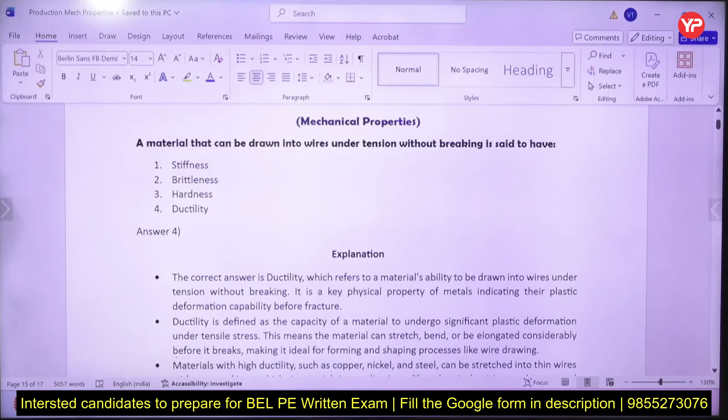These were the actual questions asked: material that can be drawn into wires under tension without breaking, obviously - so ductility. What is ductility, what are hardness measuring devices, what is brittleness, what is stiffness, what is the relation between stiffness and brittleness, and how do you measure all these properties from the stress-strain diagram. As I told you, this topic is a combined topic for material science, strength of material, engineering materials, and production engineering, so you have to think of it as a combined topic only.

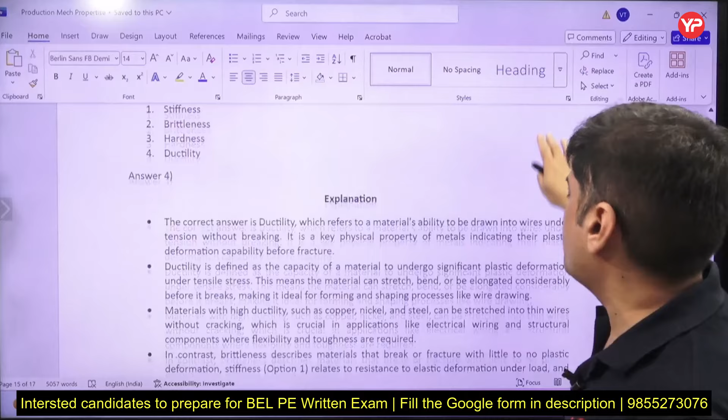It is the ability to draw into wires without breaking, and then there is a similar property called malleability. So ductility and malleability can be known from the x-axis of the stress-strain diagram. Incidentally, gold happens to be the most ductile and most malleable material. Spreading it into sheets is malleability, and when you check malleability, you apply compressive force - you hammer it and spread it into sheets. For ductility, you apply the pulling force.

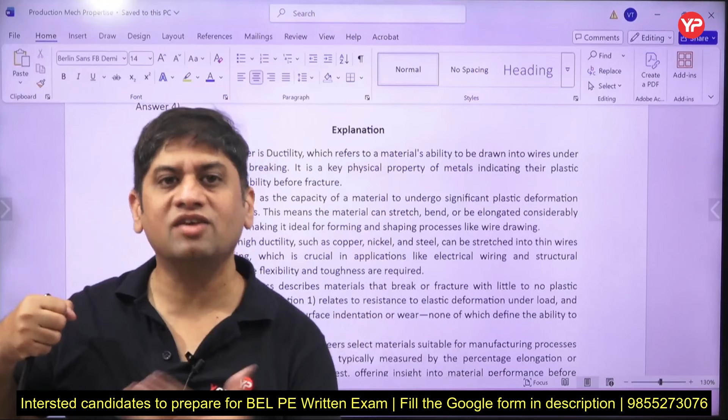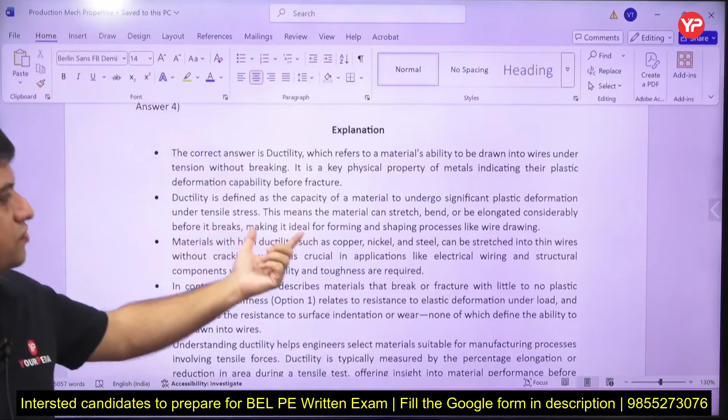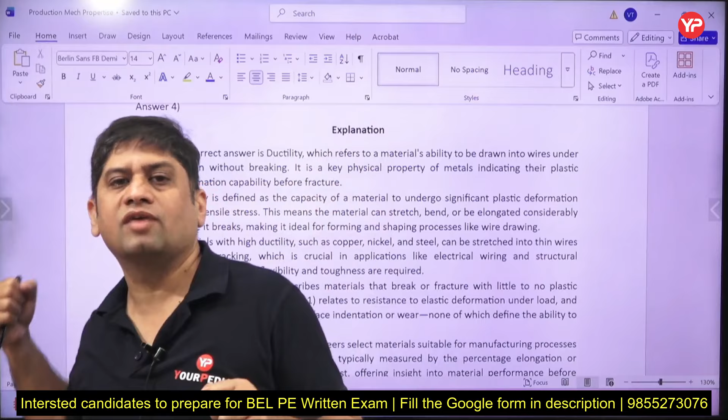Tensile force is applied for ductility, and for malleability compressive force is applied. Ductility is the capacity of a material to undergo plastic deformation along the x-axis under tensile stress. If a stress-strain diagram is plotted, you know the universal testing machine is the device on which you plot it, and in this machine the pulling or tensile force is applied. So a typical stress-strain diagram is engineering stress versus engineering strain, not the true stress-strain diagram.

In engineering stress and engineering strain, you pull and apply tensile force, and then this gets used in wire drawing.

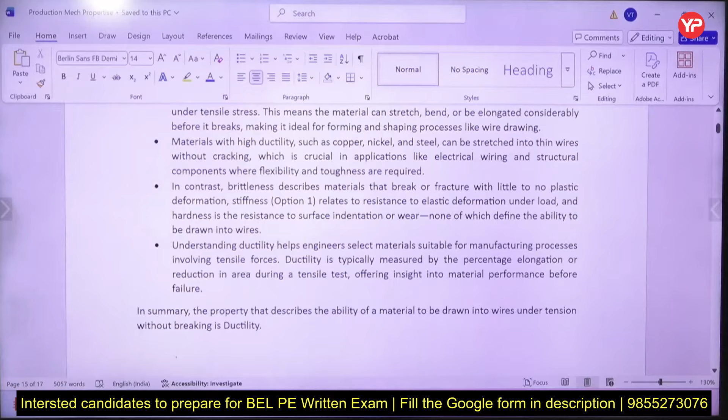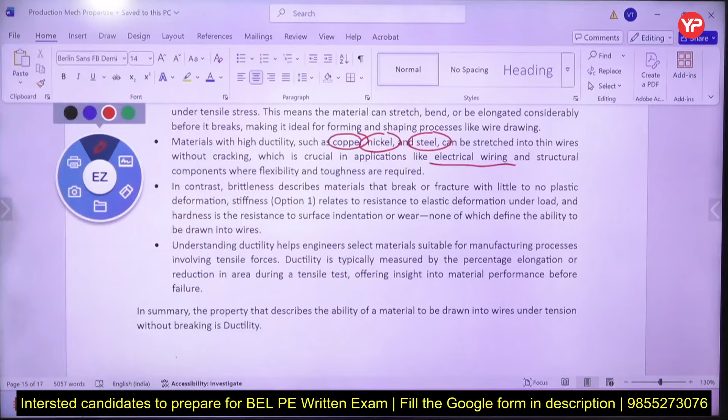The materials which have very good ductility - gold is the maximum ductile, that is why gold is used as an ornamental material. Copper, nickel, steel is a tough material, so crack propagation or cracking is not there. In electric wiring, why do you use copper wires? One reason is conductivity, another reason is ductility. So brittleness is the opposite of ductility - lesser ductile means brittle, it is resistant to plastic deformation, that is brittle.

So something which is not ductile is brittle. And how do you know on the stress-strain diagram whether a material is ductile or not?

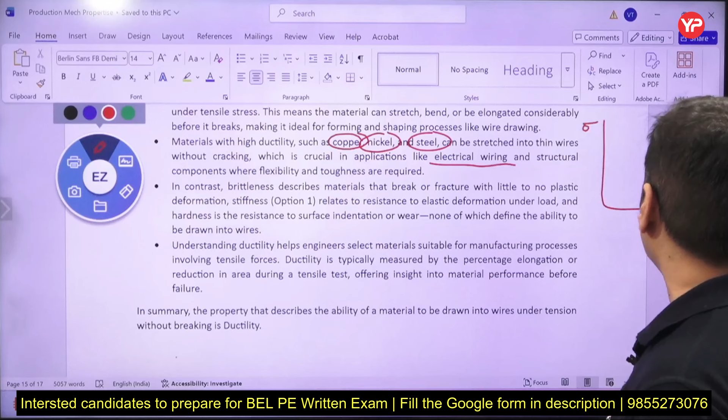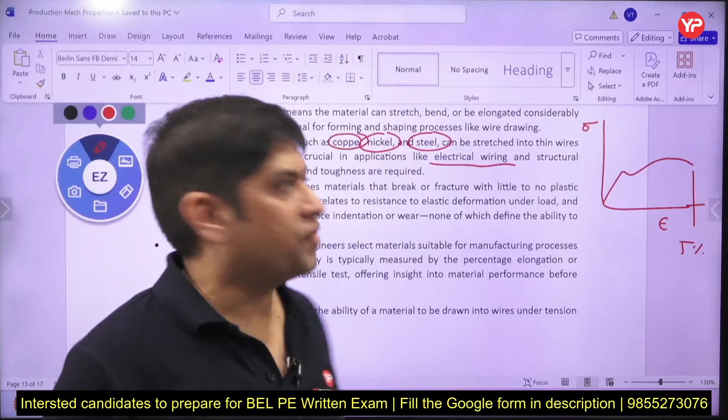On the stress-strain diagram, this is engineering stress, engineering strain. The percentage elongation, that means strain, is calculated in absolute units and also in percentage. If the fracture point is beyond 5% of the strain, then it is ductile, otherwise it is brittle. That is the rough idea of how you know whether it is a ductile or brittle material.

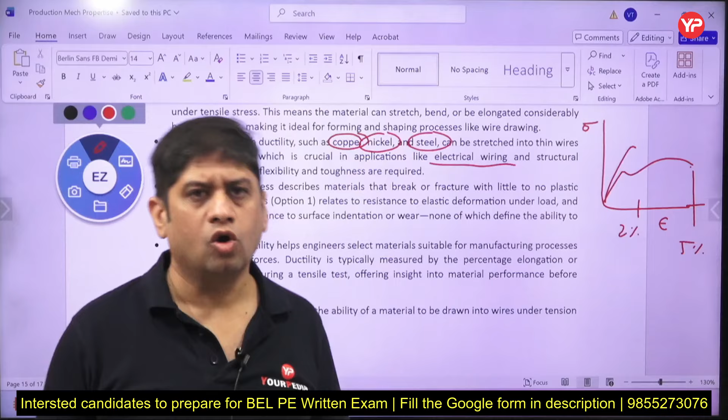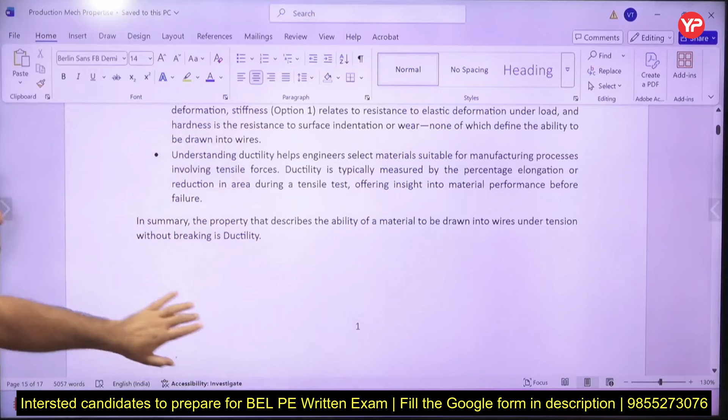So from there you get to know whether it is ductile or brittle. There are many manufacturing processes, like wire drawing, in which you test the ductility of the material. So we discussed where on the stress-strain diagram you find out about ductility.

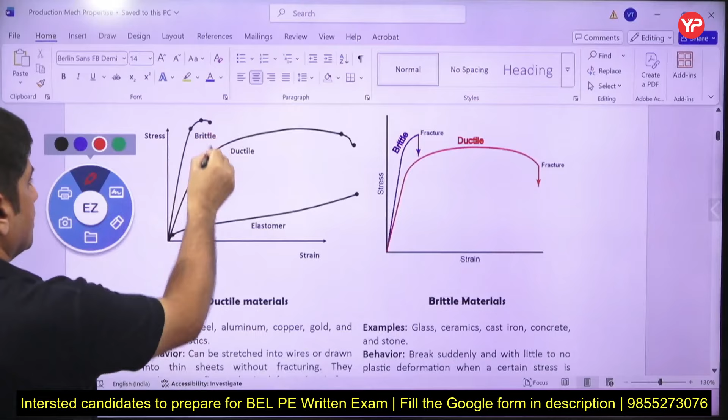I told you the main difference between brittle and ductile on the stress-strain diagram is the plastic deformation region. This region is almost missing in brittle materials. So this side can be the elastic material and the right side can be the plastic deformation material. If you do not find the plastic deformation region, then it is a brittle material.

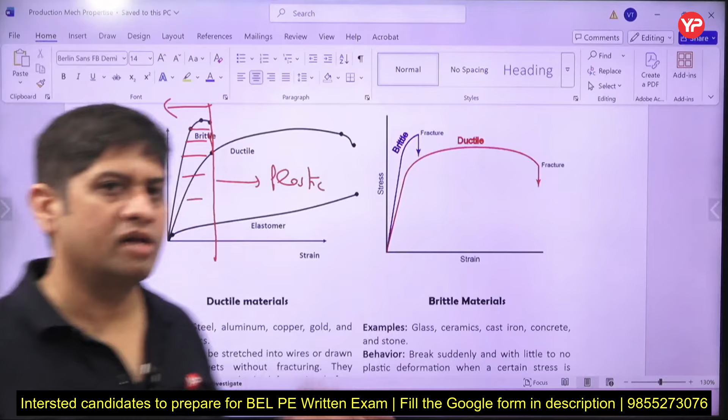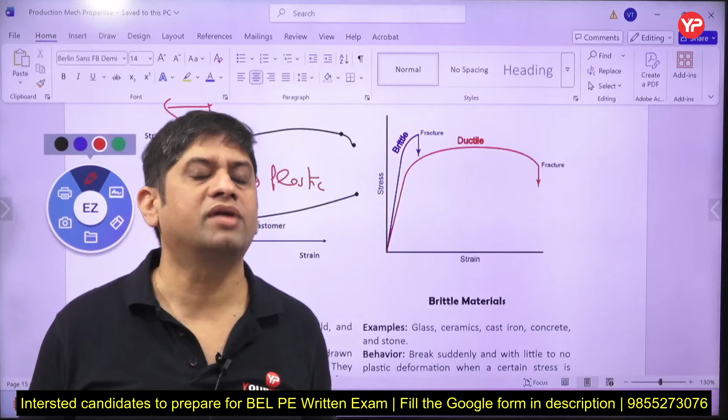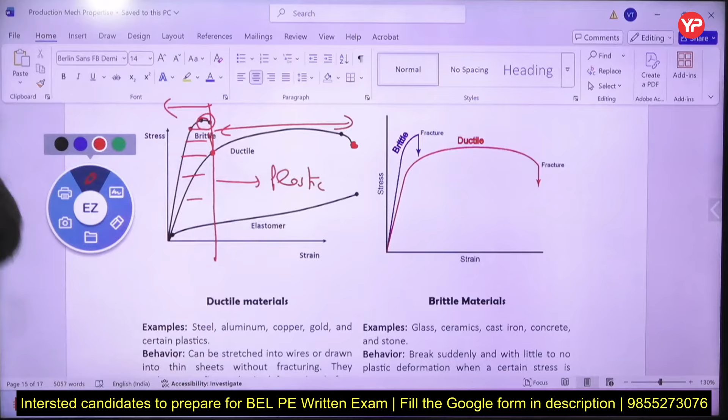Another difference between brittle and ductile on the stress-strain diagram - one I gave you is the 5% concept, second I told you plastic deformation is not there in brittle materials. Third, I am telling you yield point and ultimate point are very close in brittle materials. This is the yield point for ductile, this is the fracture point for ductile - you see the difference. But here, yield point, ultimate point, fracture point - all close. So basically in brittle materials these points are very close, in ductile materials they are far away.

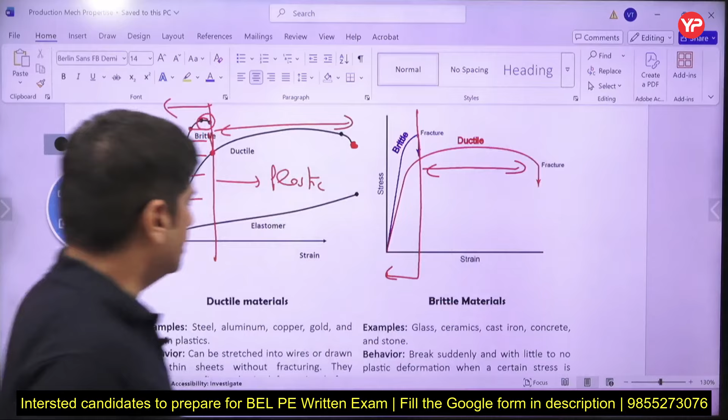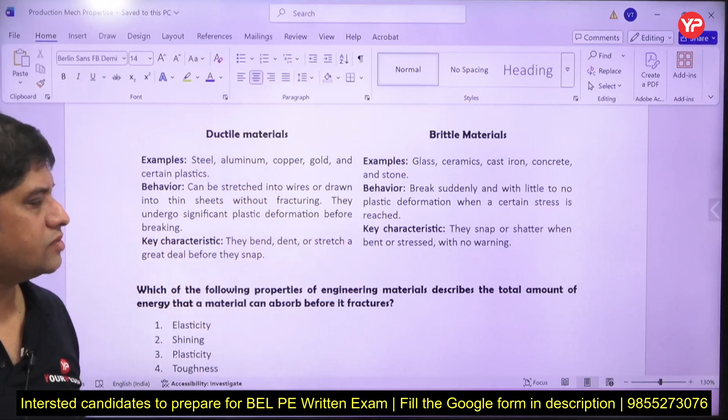So this is typically brittle - the mode of failure is fracture, and this plastic region is your ductile material. Now some examples of ductile and brittle materials, their properties and applications that you should know. Glass, ceramic, cast iron, concrete, stone - these are all brittle materials. Sudden failure, fracture - that is what brittle material is all about.

So, properties of engineering materials - these are actual Bharat Electronics Limited questions. Describe the total amount of energy that a material can absorb before it fractures. Total - so total is toughness. There is a modulus of toughness, and there is a modulus of resilience.

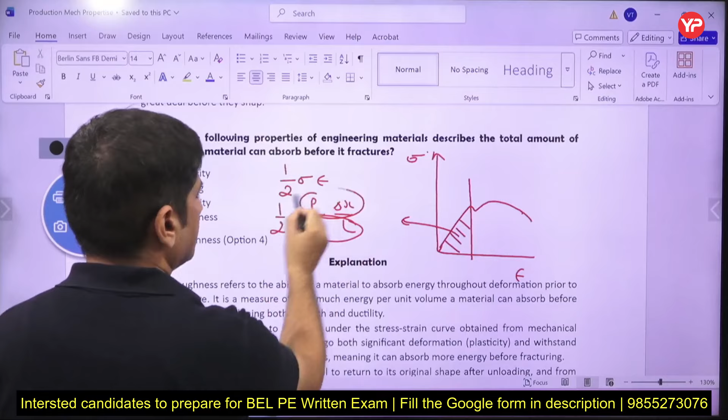Let me give you the stress-strain diagram of mild steel. This is the elastic region, the area under the elastic region - and for the unit of the stress-strain diagram, this is half of stress into strain. Stress is load per unit area and strain is change in length over original length, so load times deformation is the strain energy. This becomes strain energy - any idea what the unit of strain energy is?

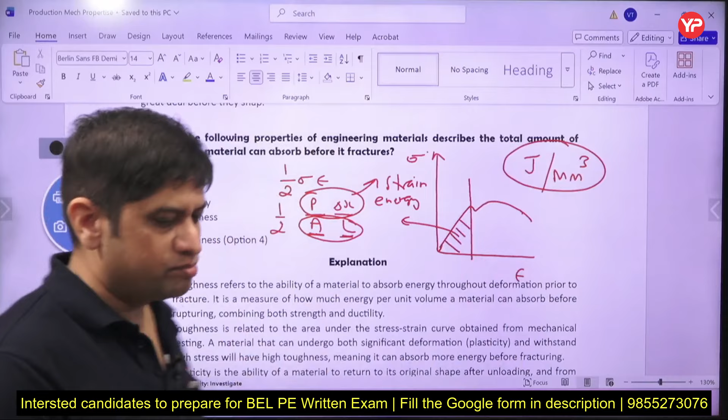Joule. This is the area of cross section, this is the length per millimeter cube. Millimeter is a very small unit. So the unit of stress strain diagram is energy per unit volume - strain energy per unit volume. Now if that strain energy is elastic, strain energy per unit volume, it is modulus of resilience.

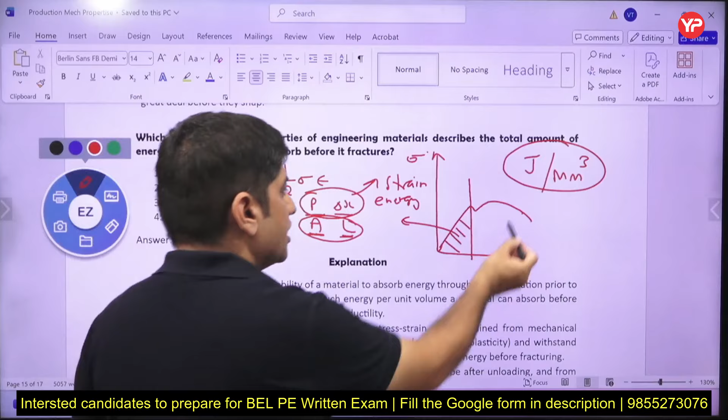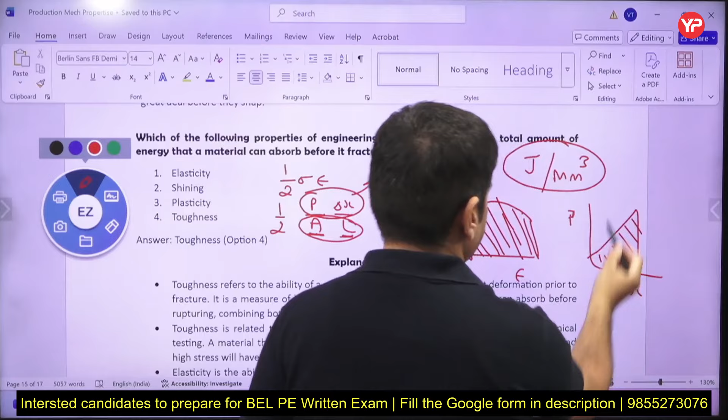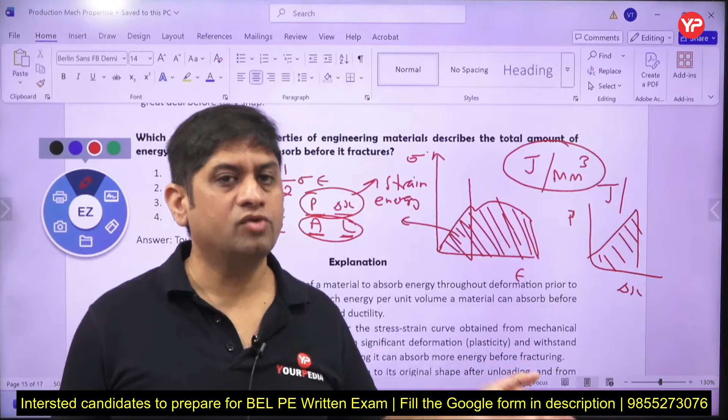But if I add entire toughness, entire elastic and plastic, it becomes modulus of toughness. Now why is it called modulus? Because it is per unit volume. If I take a load deformation diagram, this is the load force deformation diagram, then the area under that will be the strain energy in Joule. What does the area of load deformation diagram give you? Strain energy. What does the area of stress strain diagram give you? So that is the strain energy per unit volume, and it has two names: modulus of resilience, modulus of toughness. Modulus of toughness till fracture point, modulus of resilience till elastic or yield point.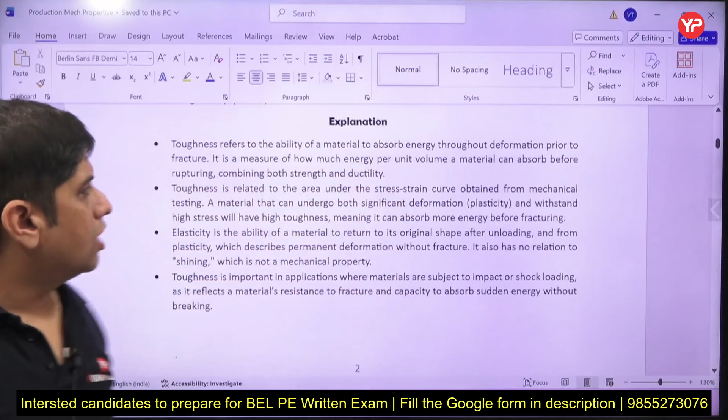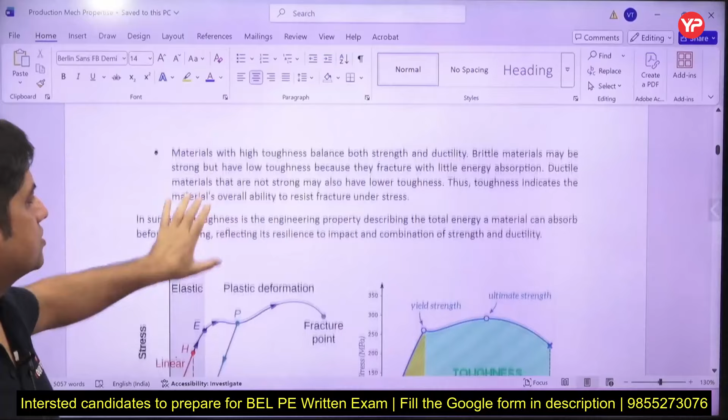So this is toughness, friends. Now what is toughness? It is the entire energy absorbed before it undergoes rupturing or fracture. So I already told you, elastic plus plastic region. Elasticity is the ability; toughness - what is elasticity, what is toughness, that you should know. So strength plus ductility is toughness.

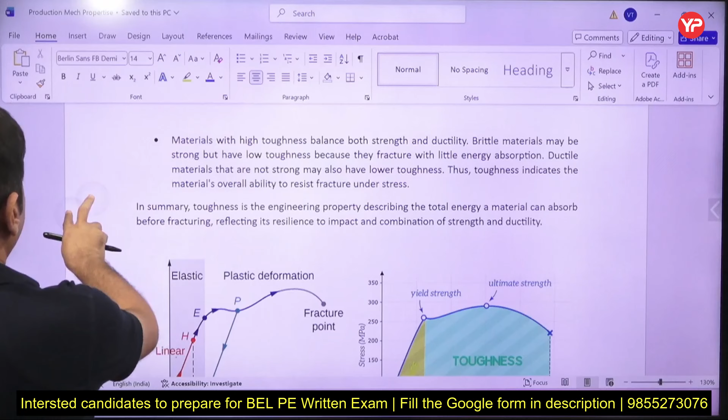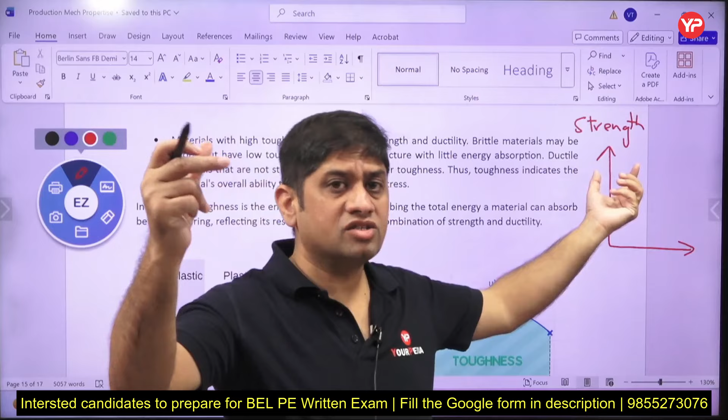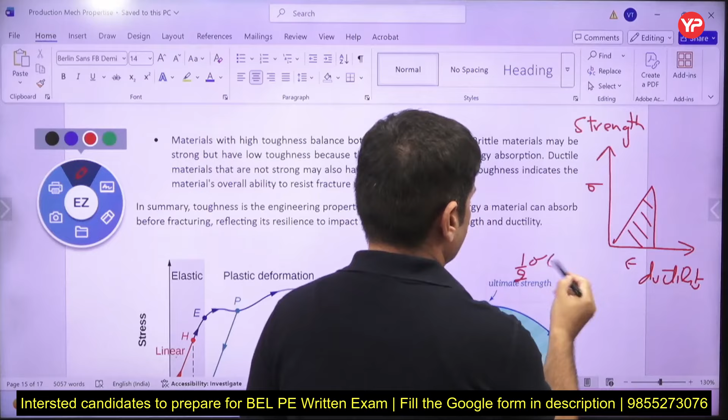Let me give you this dimensional information about the stress strain diagram. Now this side is strength. Y-axis of stress strain diagram gives you strength. Property is strength; stress is not a property. Stress is load per unit area, basically resistance force induced per unit area - that is called stress. But the limiting stress at which body may fail, that is called strength. Now strength is y-axis, and strain or ductility or malleability you get to know about on x-axis. Area is both stress and strain, half of stress into strain - y-axis is stress and strain is x-axis.

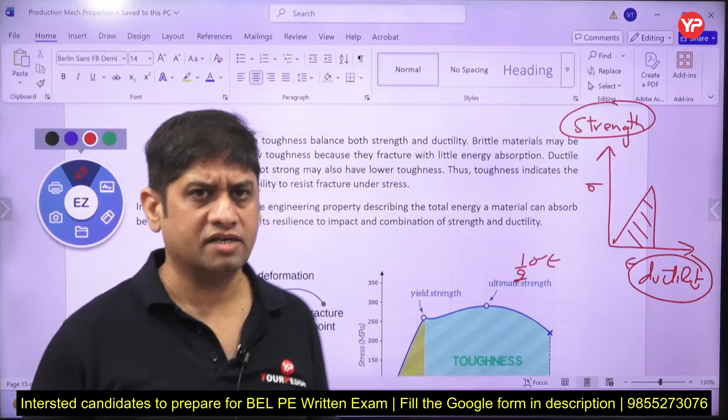So when you multiply these two, you get toughness. So toughness is a combination of strength and ductility. Material which is strong and ductile is also called tough, like steel. Material which is strong but not ductile, like cast iron - cast iron is a brittle material, so it is not tough. It may be resilient, right?

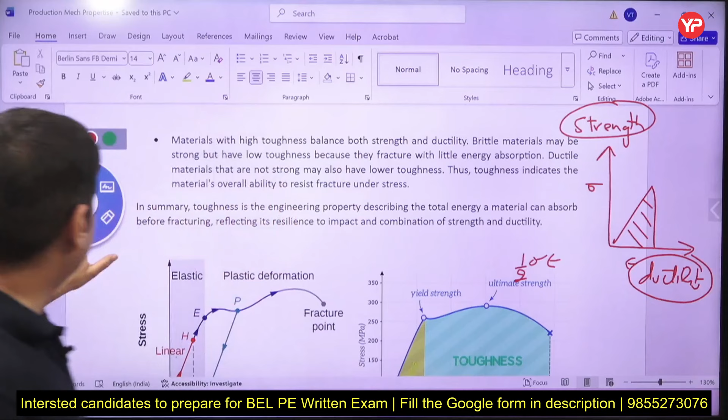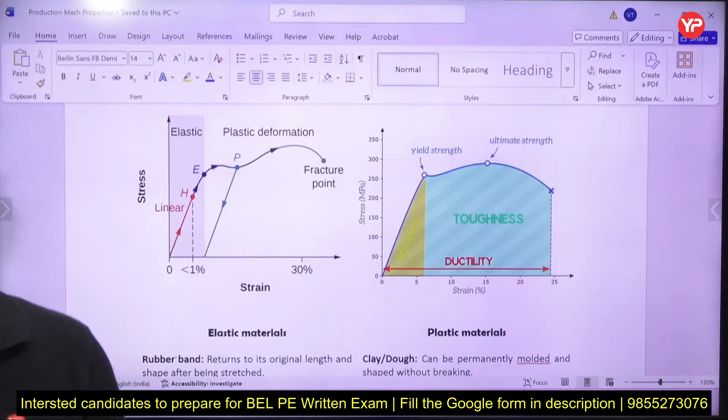Now see these diagrams. So typically in mild steel this is 25%, fracture point is till 25% in mild steel, you should understand that. So this 25%, this is ultimate strength. So these strain values you should remember, because in Bharat Electronics Limited you may get these kind of questions - up to what strain value you are getting what, and yield strength is up to what percentage, so you should have those ideas.

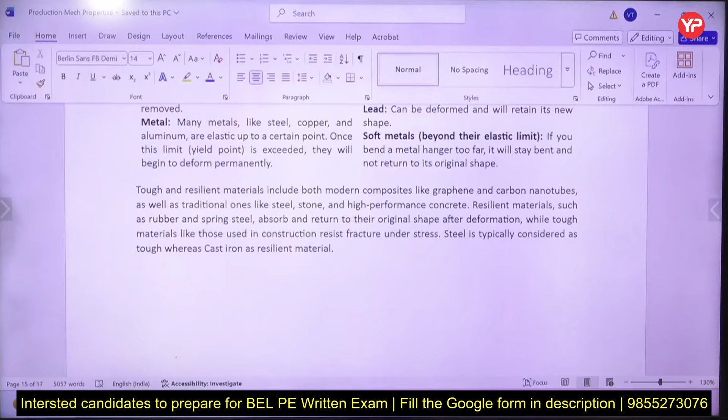Elastic material, plastic material, their examples. So typically spring should be a resilient material, right? All the metals are basically elastic. So this is for your information, friends.

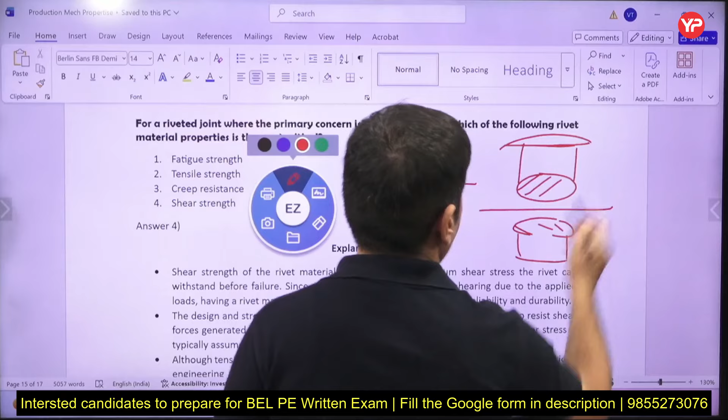Third question which was asked was shearing of rivets. Breaking a rivet - shearing. Let me give you a rivet, let's say. Now I sheared it from here, so it will look like a cross section area. I broke it from here, right? So I sheared it from here, so one surface gets sheared over another surface, right? Maybe you are developing this concept, how I am shearing it. So sliding of one layer tangentially on the other is called shearing. For that, shear force is needed.

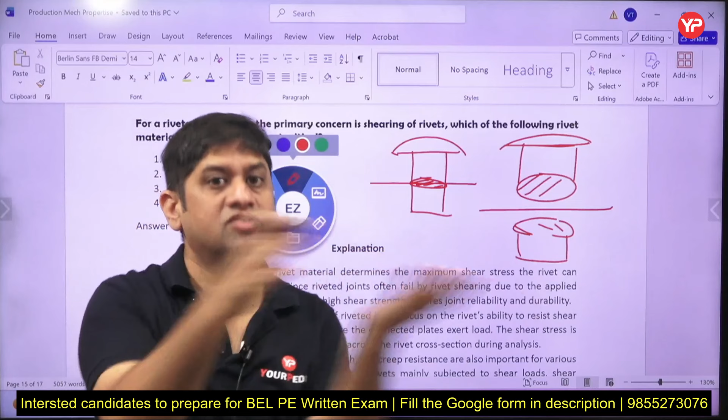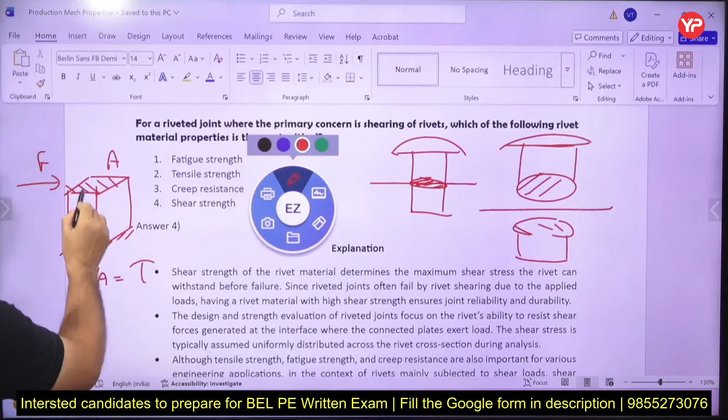So if I give you a diagram, friends, a 3-dimensional diagram of the shearing phenomena - suppose I apply force like this. This is the area of cross section. So force per unit area is the shear stress induced. So I am applying shearing force. And what happens when you apply shear force? There is a shearing strain. There is an angle phi - it is called shear strain. So there is a small inclination or deviation, that is called shearing strain.

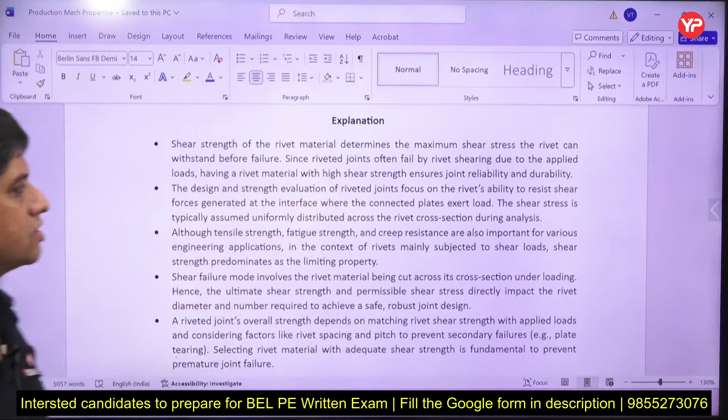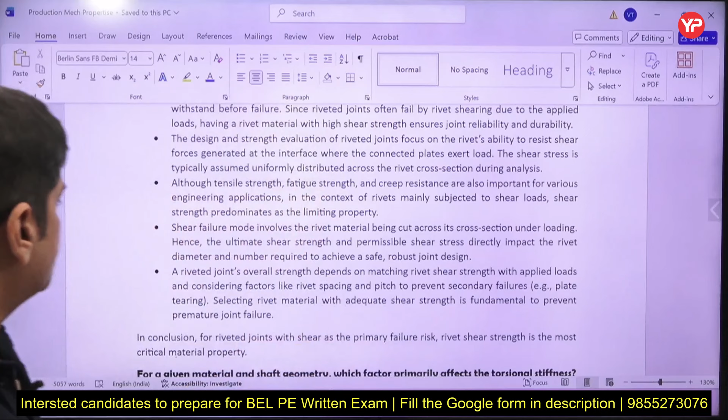This is the shear strength which is evaluated. In rivets, where shear force is induced, shear strength is important, and typically shear strength is lesser than the tensile strength. If shear strength is almost half of tensile strength, in brittle materials shear strength is more than half of tensile strength, while in ductile materials shear strength is less than half of tensile strength. That is what you should know, these are material properties.

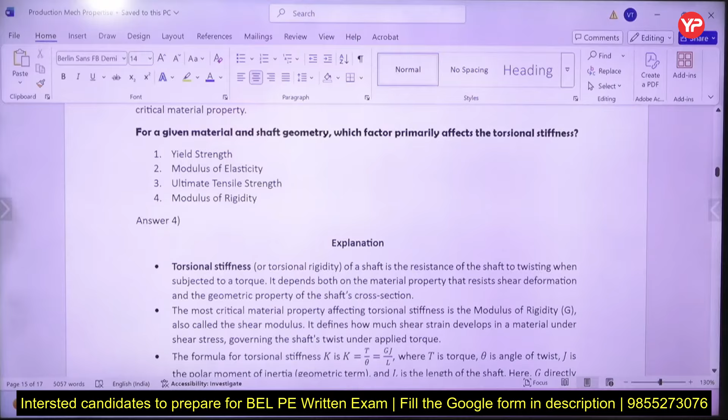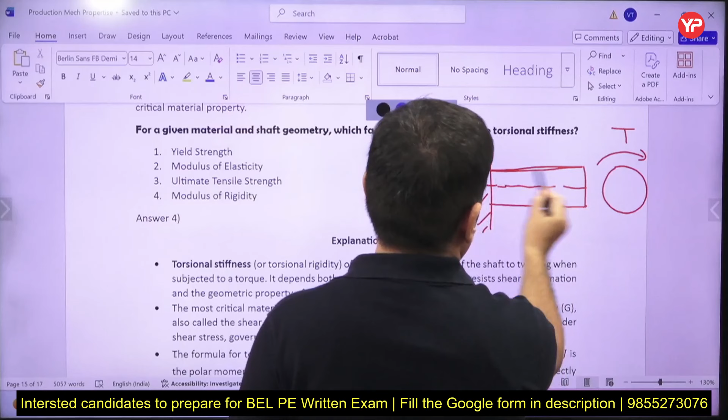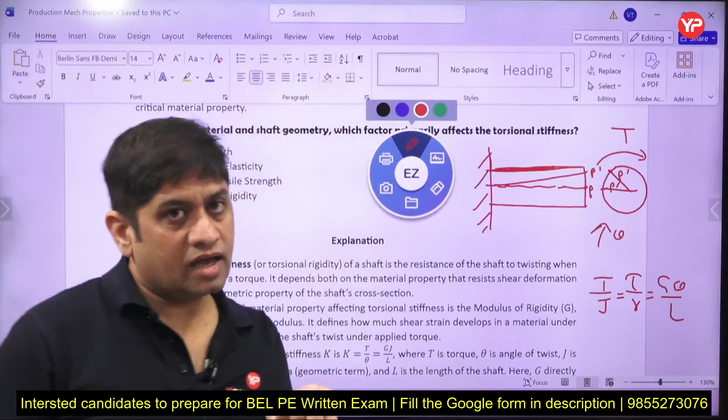So T over J is equal to tau over R is equal to G theta over L. Now this theta is the angular twist. So I gave a torque, meaning rotation, and after that it twisted, the whole surface twisted around the axis. That is the torsional effect. G is the modulus of rigidity, L is the length of this shaft, T is the torque which I applied, J is the polar moment of inertia, tau is the torsional shear stress induced, R is the radial distance at which it is induced.

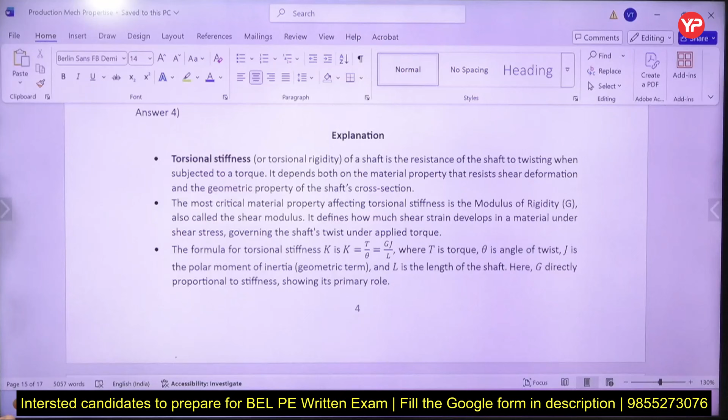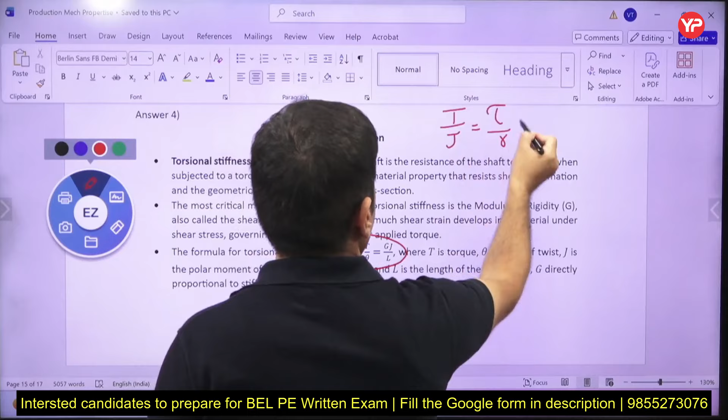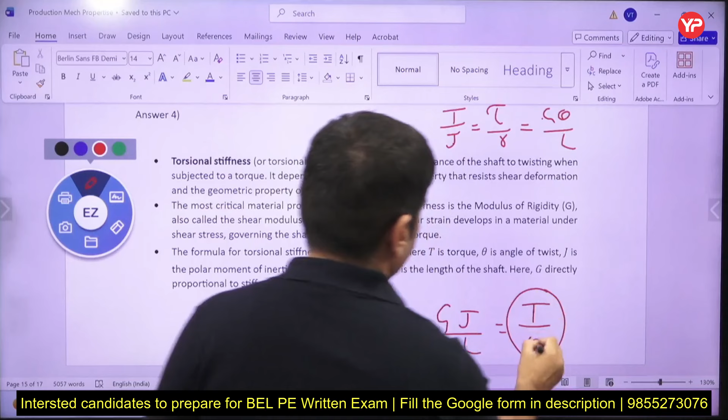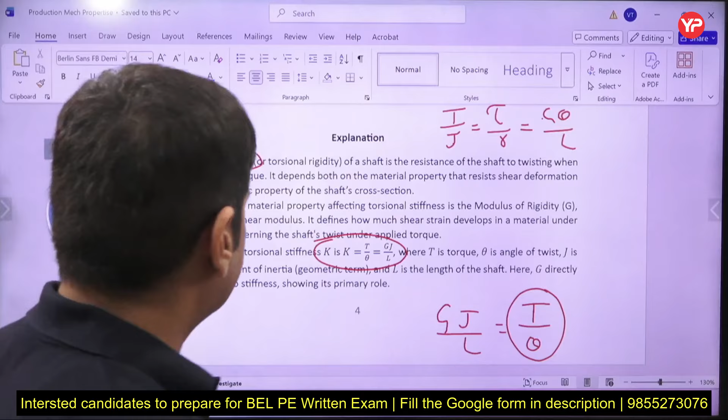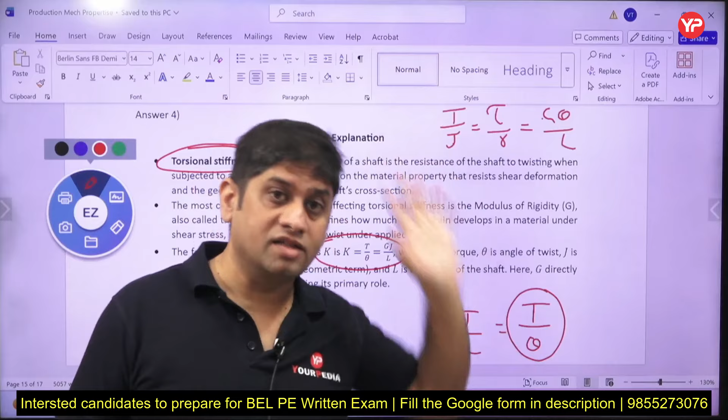So if I do G J over L, this becomes T over theta. So torque per unit angular twist, torque applied per unit angular twist, is the torsional stiffness. So stiffness, rigidity, those things we will discuss. Axial rigidity, stiffness, strength of material, you study these topics. As I told you, this is a common topic for strength of materials, science, and production engineering. So torsional stiffness, you will study this equation in strength of materials, I am sure you will do that. But here remember, this is your torsional stiffness.

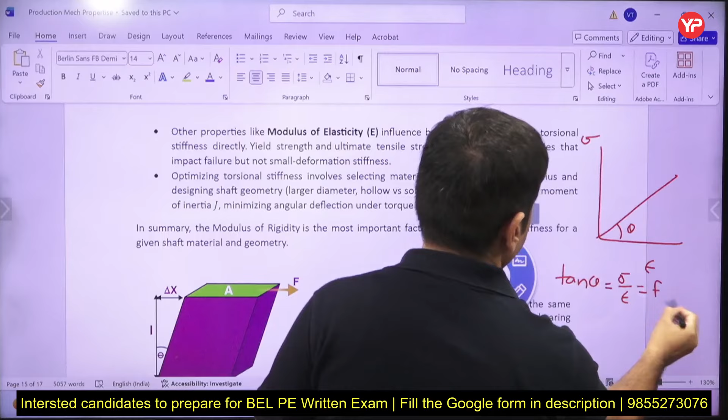Modulus of elasticity is something which you get as the slope of the stress-strain diagram, and this is related to bending. If I plot normal stress versus normal strain, this is the angle theta, so tangent theta is stress over strain, that is Young's modulus of elasticity, and this is related to bending because in bending you apply the load, and when you apply the load the body undergoes some kind of deformation. So in the case of bending you talk about modulus of elasticity, this is E. And this is the concept of shear modulus of rigidity. This is how you should understand it.

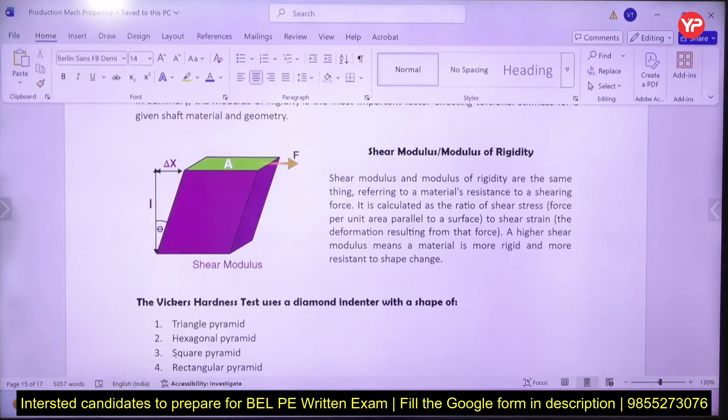Now hardness test, friends. Hardness is something which is resistance to scratch. It is a surface phenomena, not a body phenomena, and it is related to the grain boundaries actually. Hardness measurement you cannot do from stress strain diagram, but yes, there are different scales on which hardness is calculated, like Vickers scale, Rockwell scale, all these scales. So Vickers hardness tester is there, which has a square pyramid.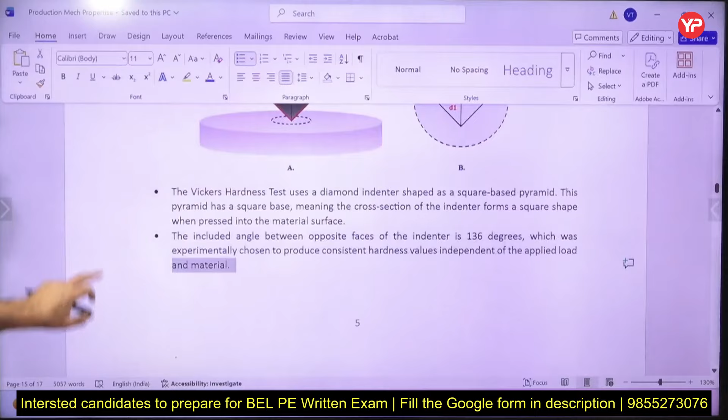It has a square base, as you can see here, this is a square, right? But it is looking like a pyramid. So the included angle between opposite faces, as you can see, is 136 degrees.

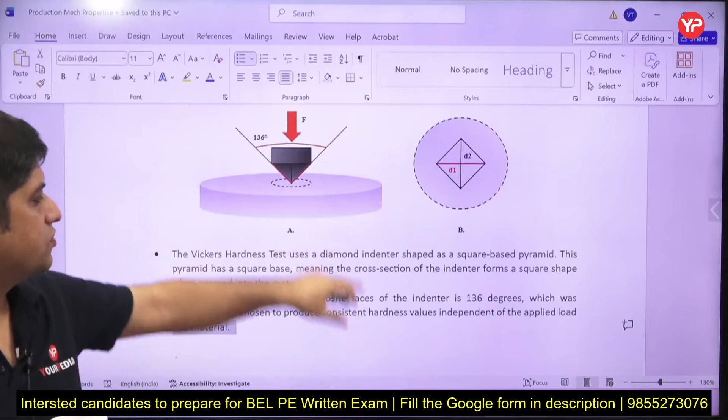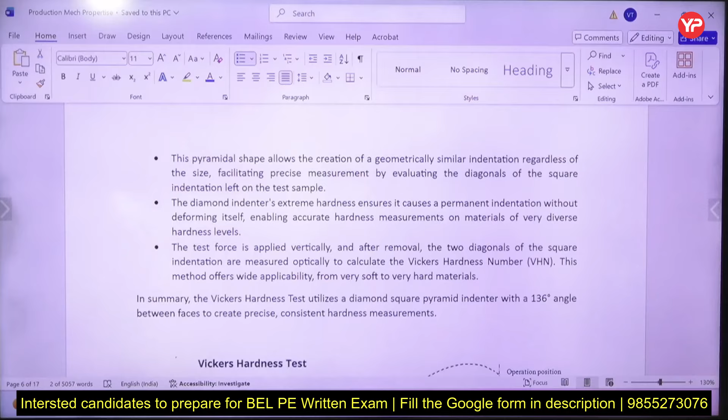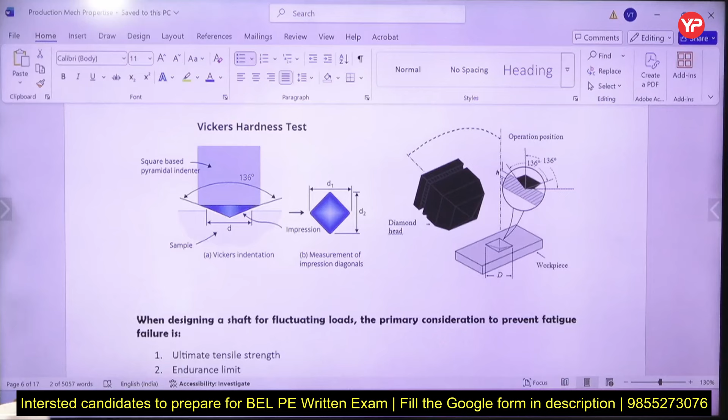So this is the Vickers hardness tester, friends. You measure diagonal D1 and D2, and in terms of D1 D2 there is a formula to calculate it, but I don't think the formula will be asked. However these basic things can be asked, and in the tabular information below I have provided you these details also.

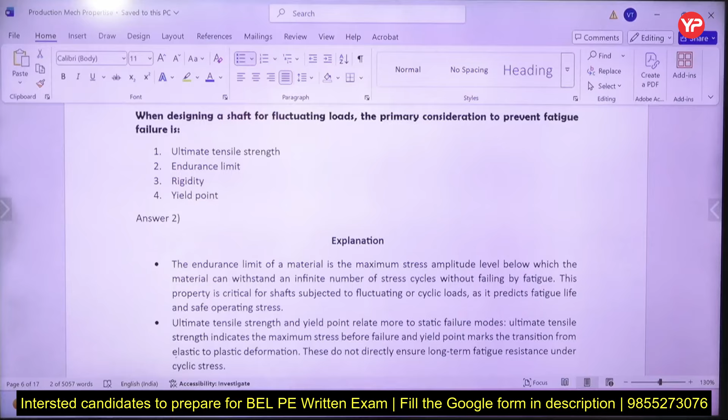Next question asked was related to fluctuating load and fatigue failure. So you know, endurance limit, fluctuating load, cyclic load, fatigue failure, all these terms are related. When the load is cyclic, sometimes compressive sometimes tensile, that is cyclic load. When the load is cyclic and you apply sometime tensile, sometime compressive, endurance is checked and fatigue failure is checked.

So how do you define it? Maximum stress below which material can withstand infinite number of stress cycles without failing by fatigue - this is the definition of endurance limit. Shafts are subjected to fluctuating cyclic loads. So fatigue is related to cyclic loading, and shafts are subjected to cyclic loading, and hence fatigue strength of the shaft is to be calculated.

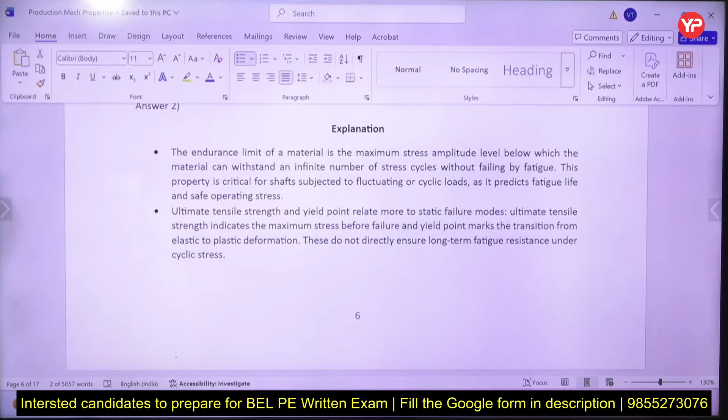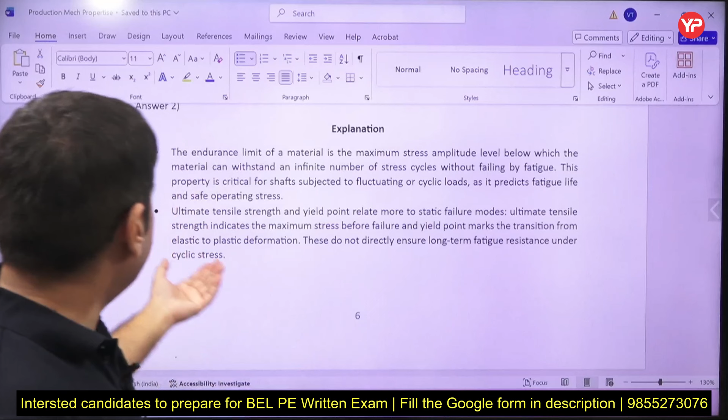Friends, you should be very clear: when shear strength is to be seen - rivet; when endurance or fatigue strength is to be seen - shaft; when tensile strength or yield strength is to be seen - normal loading. So in case of ultimate tensile strength or yield point, basically yield strength is the design strength, not ultimate strength, for static load, static mode of loading. That is how it is to be done.

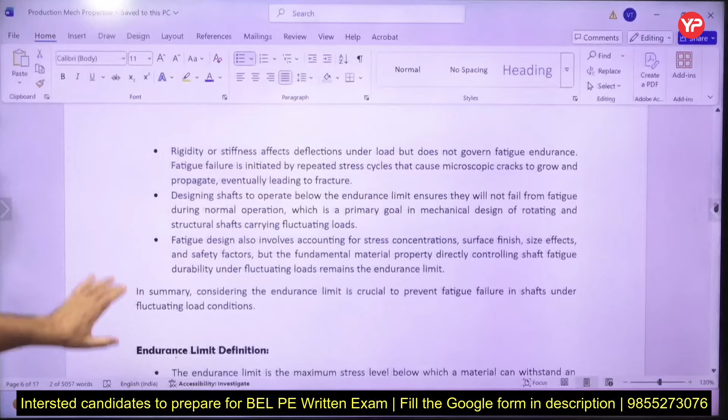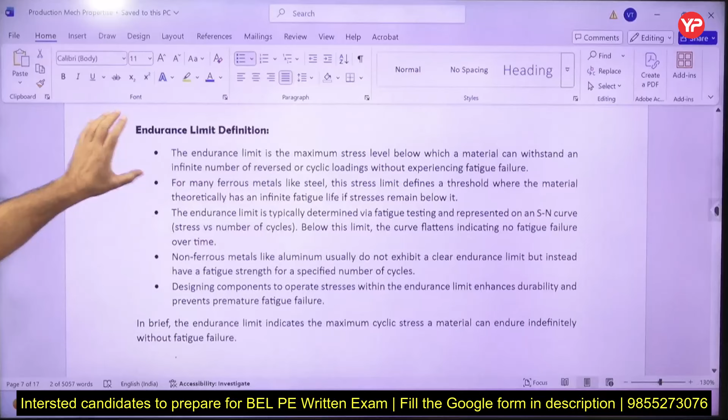So rigidity, stiffness are the terms which are related to static loadings, right? Fatigue is more related to cyclic loading. Now what is endurance limit definition? That also you should go for. I am giving you this detailed thing to understand, but this is taught in your lectures also.

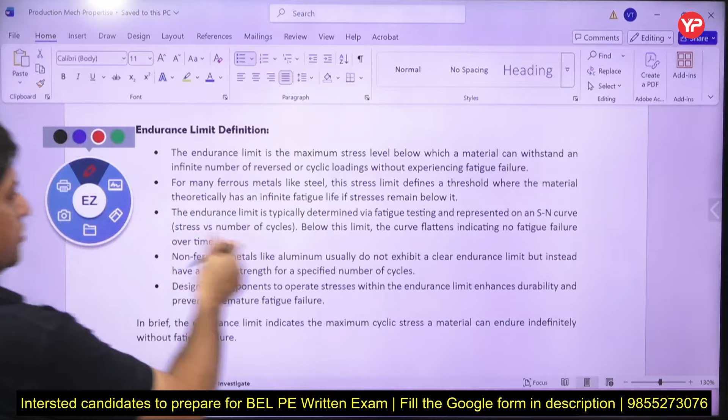Now, on the basis of these questions which were asked in the previous years in Bharat Electronics Limited, here are multiple expected questions. What can come now? If ductility came, malleability can also come. What is the meaning of malleability? How are ductility and malleability related?

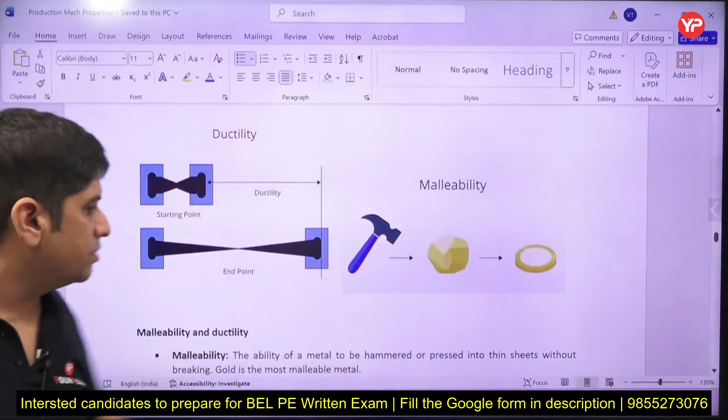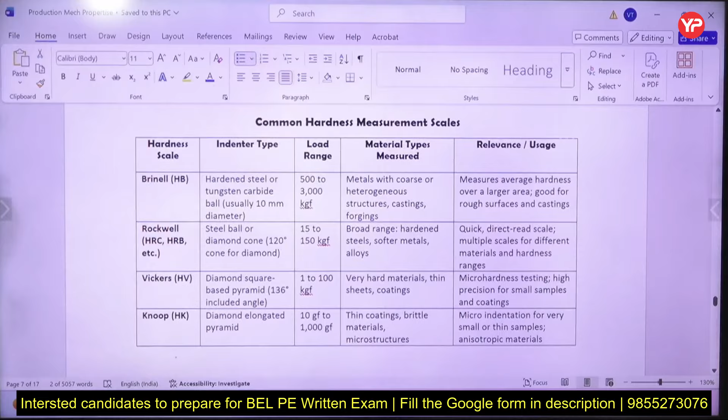The most important part of our PDF that helps you crack this exam within 60 days or 2 months is also part of our book - that is the tabular learning content. In tabular learning content we have everything you should know at the 11th hour before the exam, provided like this: Elasticity, plasticity, modulus of rigidity, ductility, brittleness, toughness - what these things are, common hardness testing machines, scales - Rockwell, Vickers, Knoop, Brinell - how much knowledge you should have, so from here the exam will be cleared.